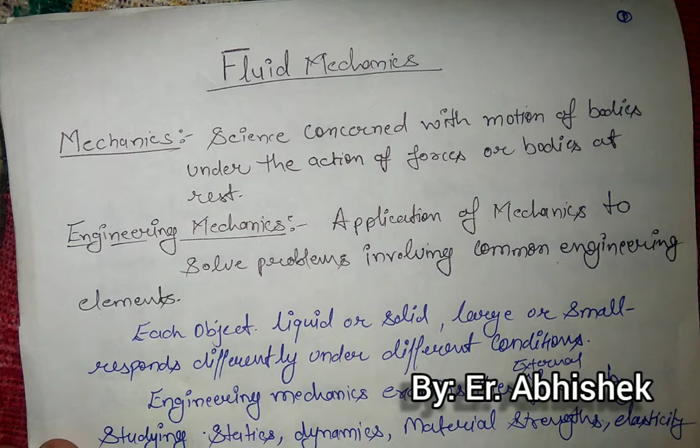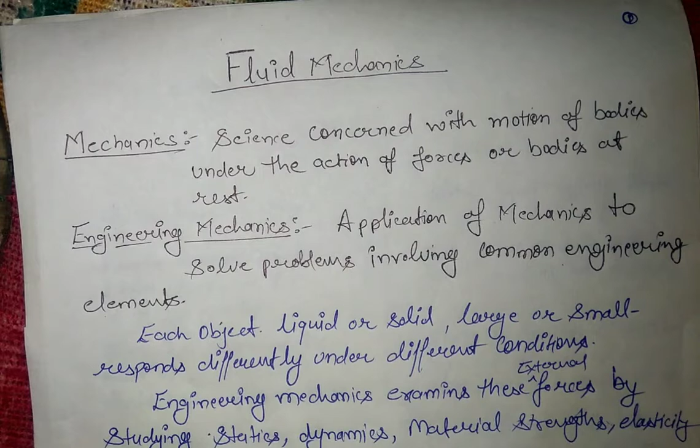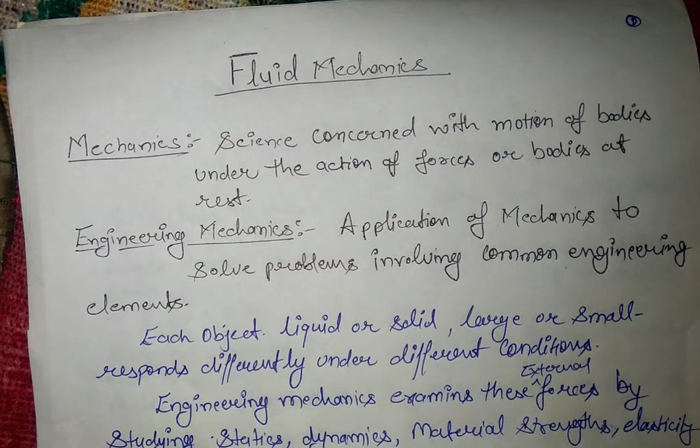So today I am going to start with the lecture on fluid mechanics. This is one of the important subjects in civil engineering or mechanical engineering. I will take into consideration all the important aspects of fluid mechanics as per civil engineering point of view.

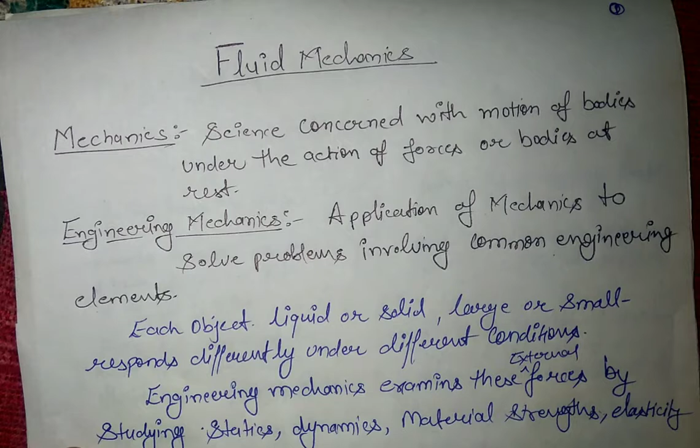Before moving into the details of the subject, let us take an introductory session on fluid mechanics. I'll give you a brief detail about the subject first, then we'll move into the core part of the subject. So before starting fluid mechanics, let us discuss briefly about mechanics first.

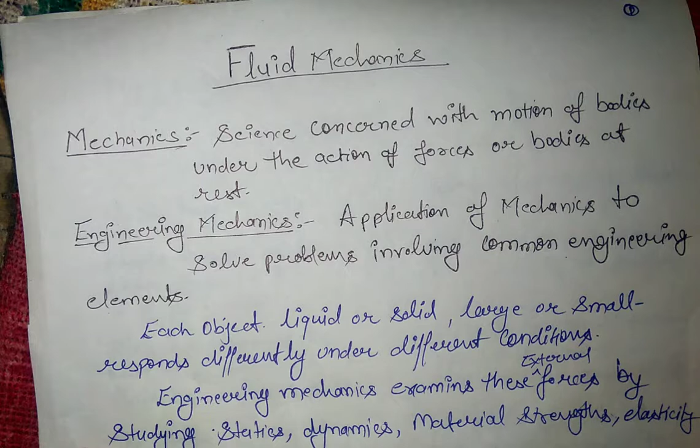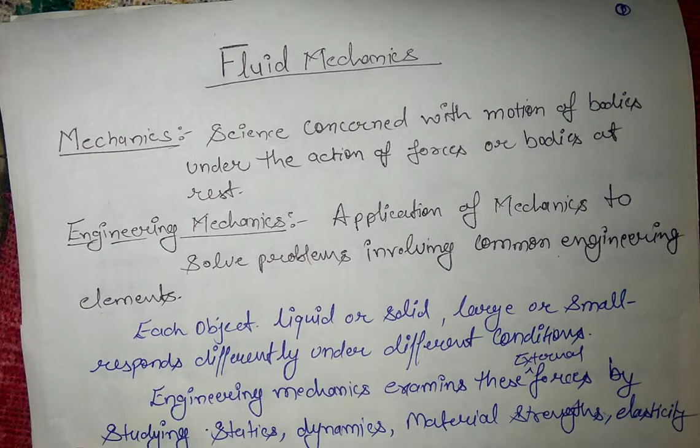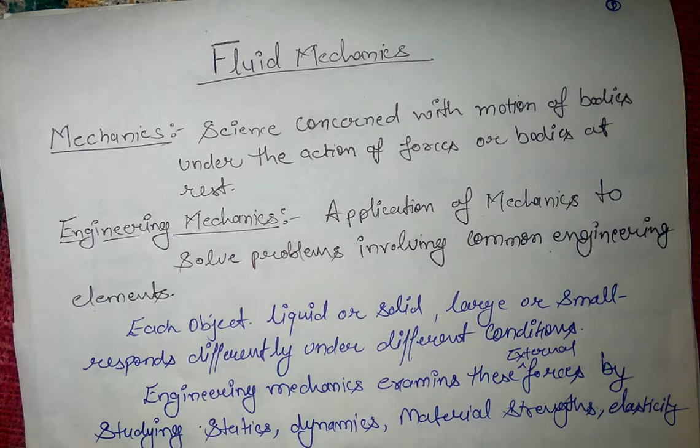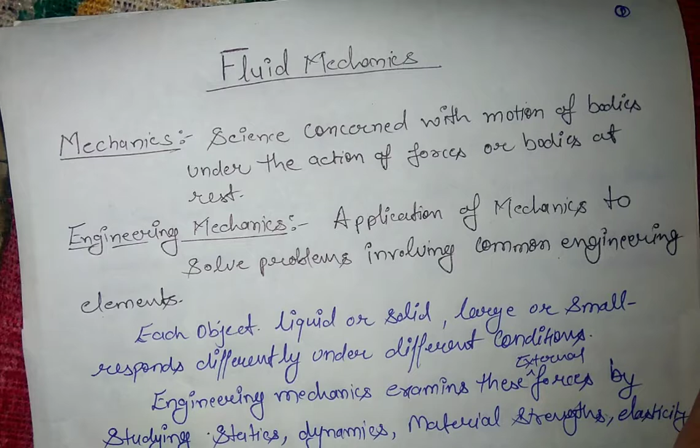You know that there are many physical laws that govern life on this earth, for example, gravitation. All these types of phenomena that occur directly depend upon the forces and impact of forces. So what is mechanics? Mechanics is the science concerned with the motion of bodies under the action of forces, or bodies at rest. In brief, mechanics deals with the forces and their impact on the body.

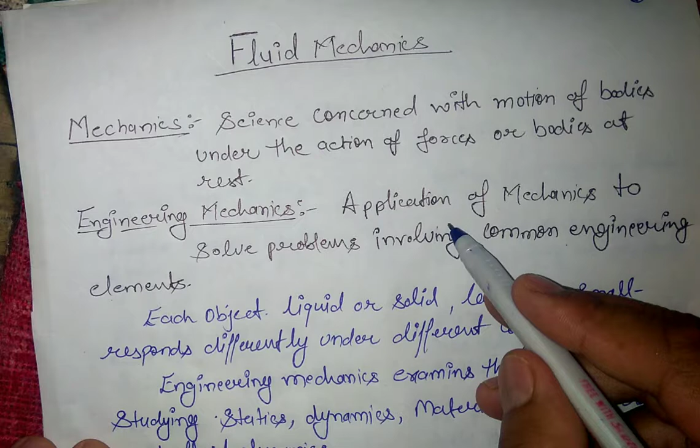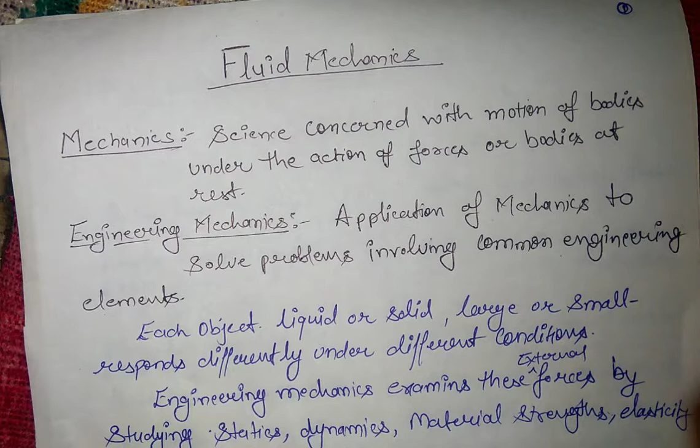Now what is engineering mechanics? Engineering mechanics is the application of mechanics to solve problems involving common engineering elements, like fluid mechanics, like solid mechanics. We are applying mechanics to engineering problems so that we can get solutions for the problems. That is termed as engineering mechanics.

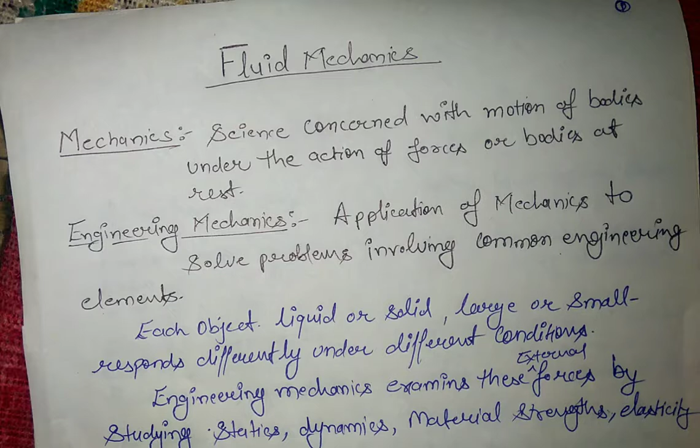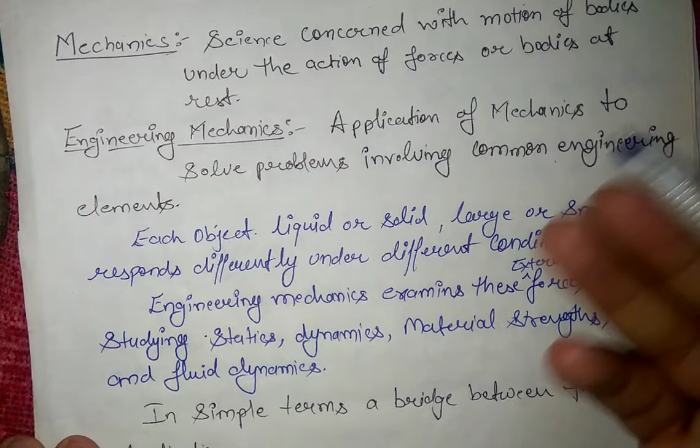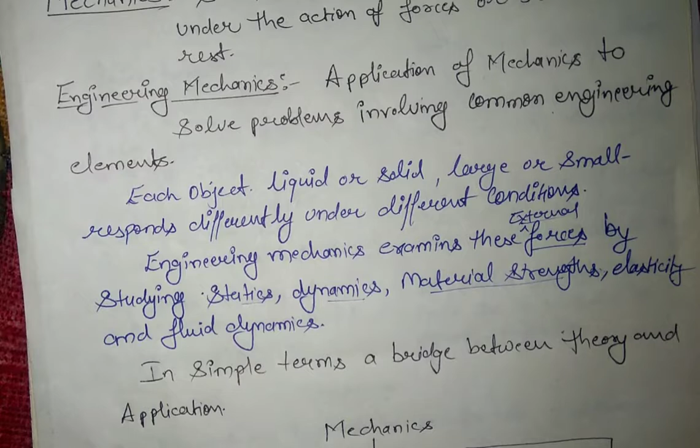Each object, like solids or liquids, large or small, responds differently under different conditions. Engineering mechanics examines these external forces by studying statics, dynamics, material strength, elasticity, and fluid dynamics. In simple terms, it is a bridge between theory and application. I hope you have got a clear idea about mechanics: it is about the involvement of forces on any object.

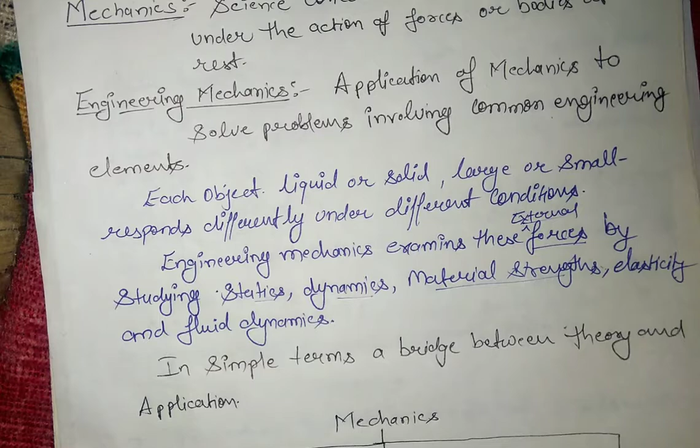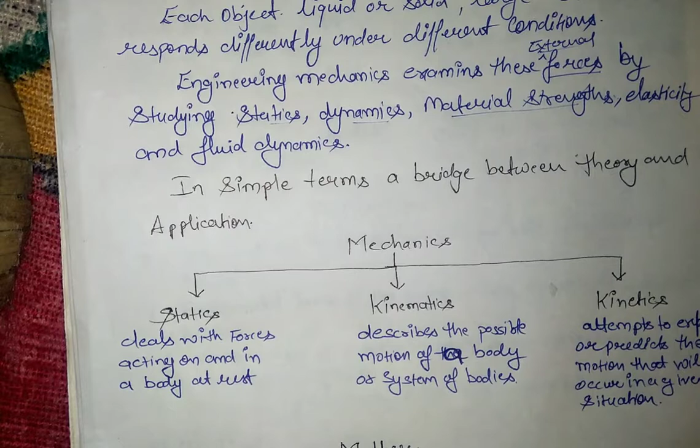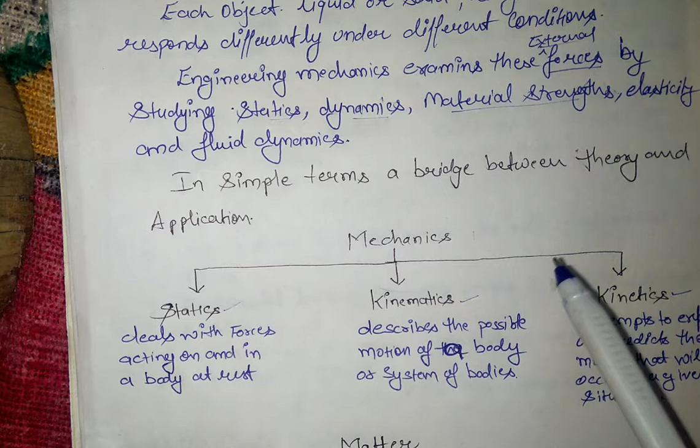Let us take into account the different branches that we study under mechanics. There are three branches: first is statics, second is kinematics, and third is kinetics. This is very important in physics. In physics, mechanics is a separate branch which we divide into three categories: statics, kinematics, and kinetics.

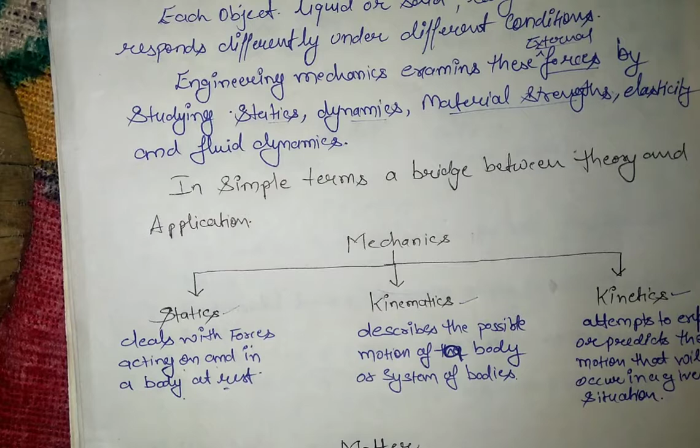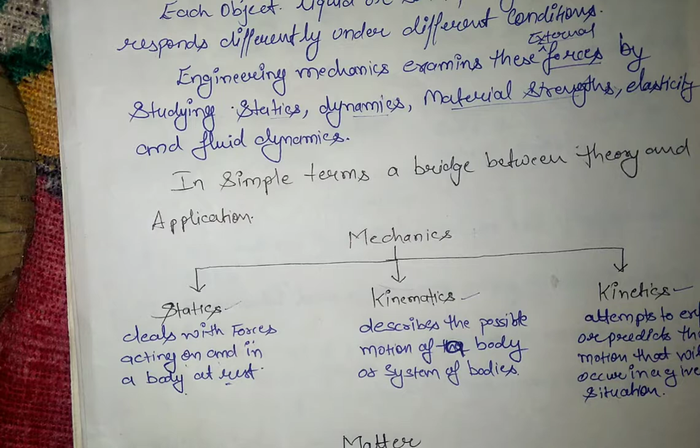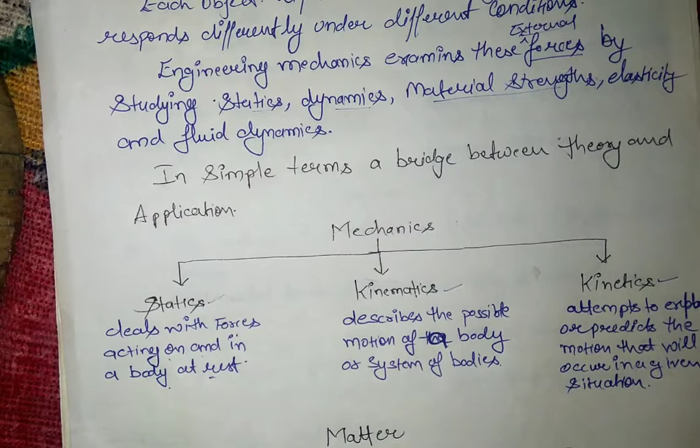So what is statics? Statics deals with the forces acting on and in a body at rest, anything that we study at the position of rest. Now what is kinematics? Kinematics describes the possible motion of a body or a system of bodies; when we talk about motion, that is kinematics. And what is kinetics? Kinetics is an attempt to explain or predict the motion that will occur in a given situation. So these are the branches.

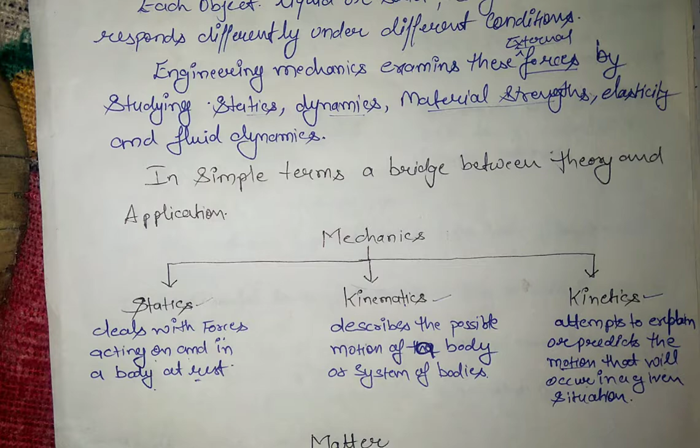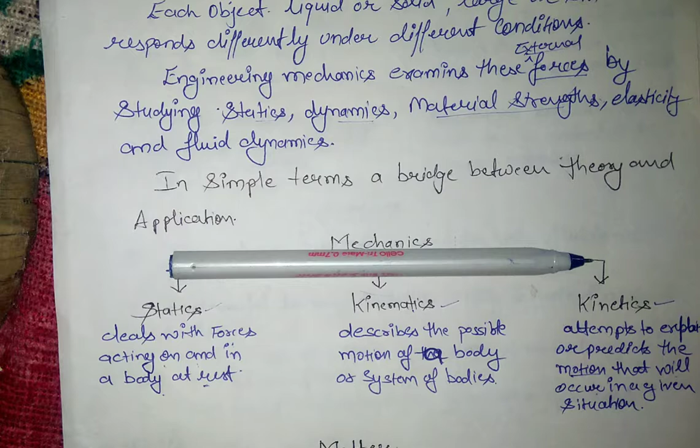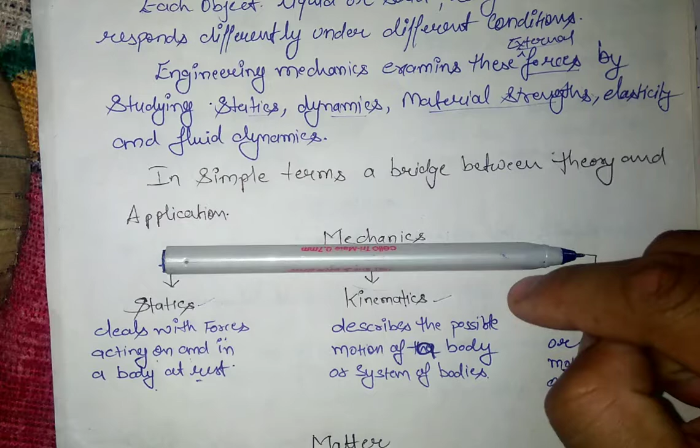Let's consider an example with this pen. Currently it is at rest. There might be several forces acting on this pen at this point of time. Whatever the impact of the forces on this pen at the position of rest, that we study under statics. When we apply some external force, the pen starts to move; that is under kinematics.

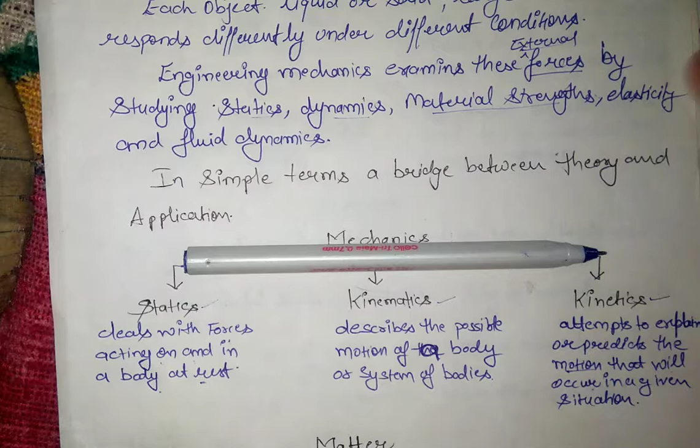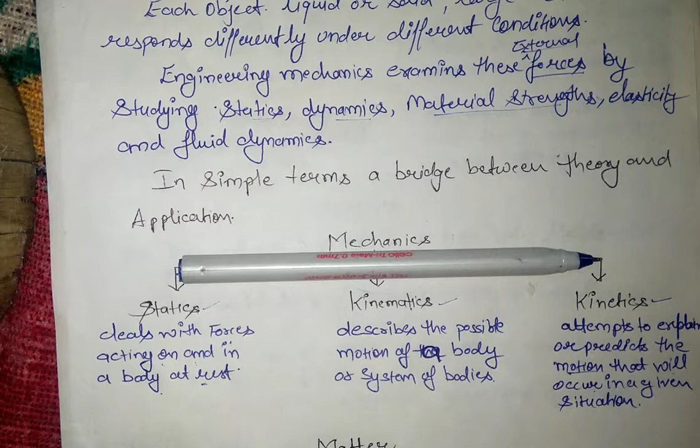And what is kinetics? Kinetics means when we try to predict the motion of this pen under a certain situation. Suppose the temperature and other things that influence the properties of this pen are fixed, and then we study the motion of this pen.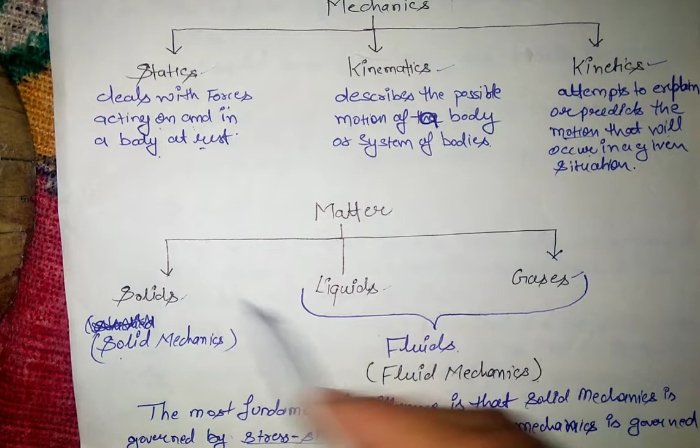Now let us take into account that there are three types of matter: solids, liquids, and gases. For solids, we study the impact of forces on solids, and that we study under solid mechanics.

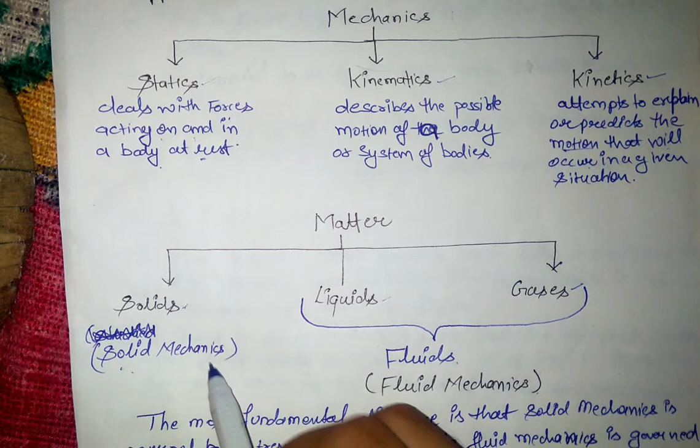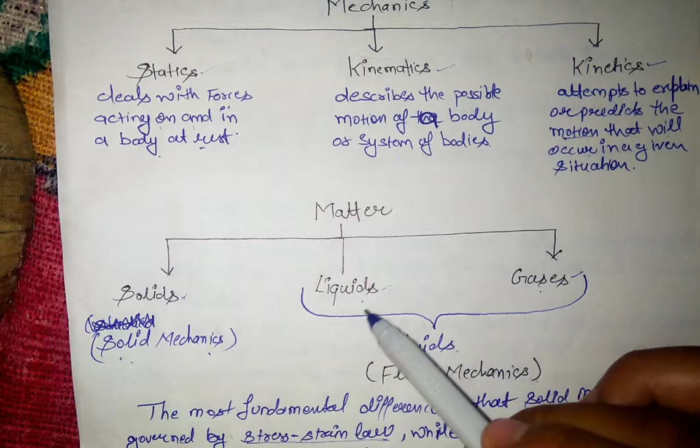Liquids and gases are termed as fluids. When we study the impact of forces on liquids and gases, we study it under a different branch that is called fluid mechanics. So these are termed as fluids.

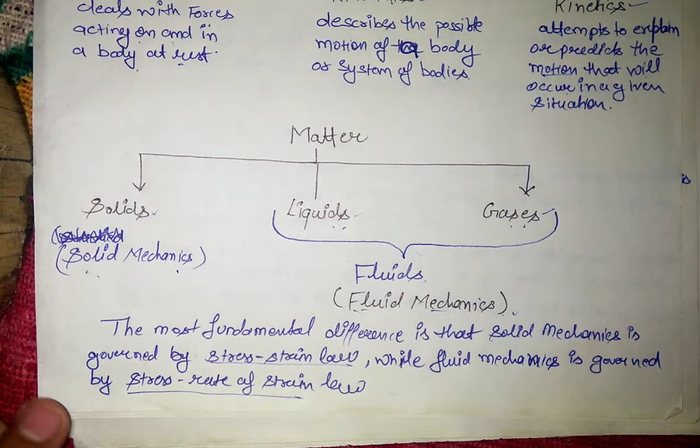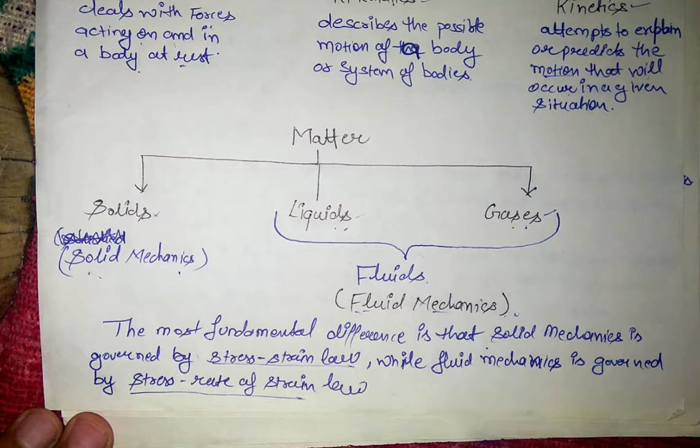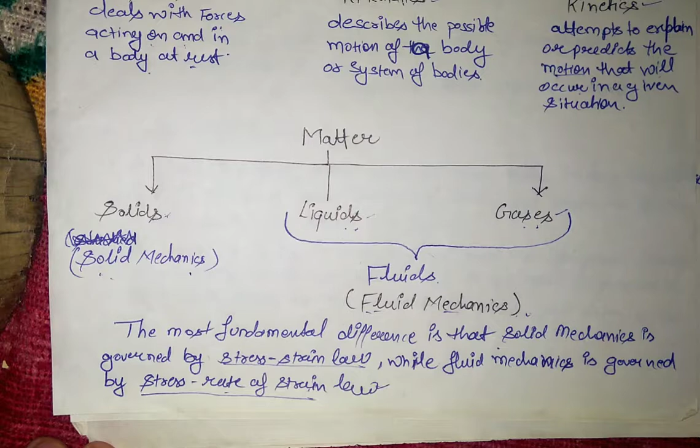So what is the basic fundamental difference from an engineering perspective? The most fundamental difference is that solid mechanics is governed by the stress-strain law, that is Hooke's law, while fluid mechanics is governed by the stress and rate of strain law. This is the basic difference. We'll study this in detail in a further lecture.

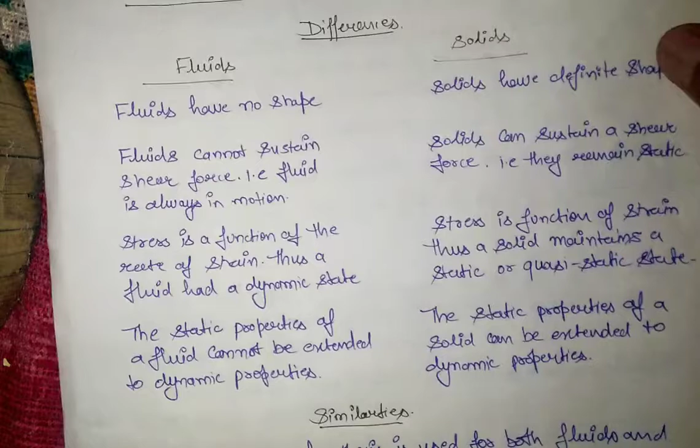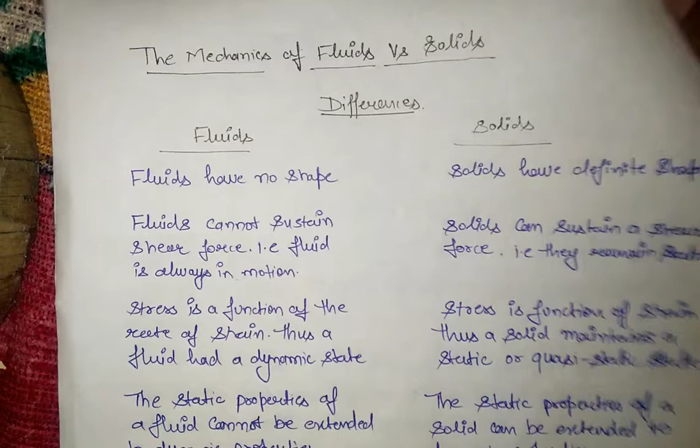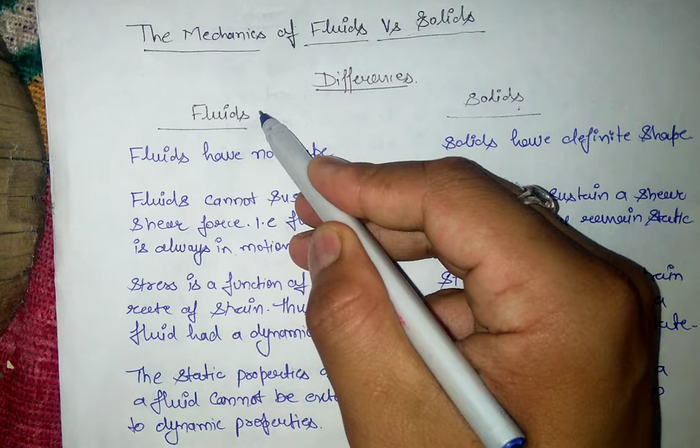Now let us consider the differences and similarities between the mechanics of fluids and solids. Here you can see fluids and solids. In fluids, for example, we take water and air. First, fluids have no shape, while solids have a definite shape. This is the first difference.

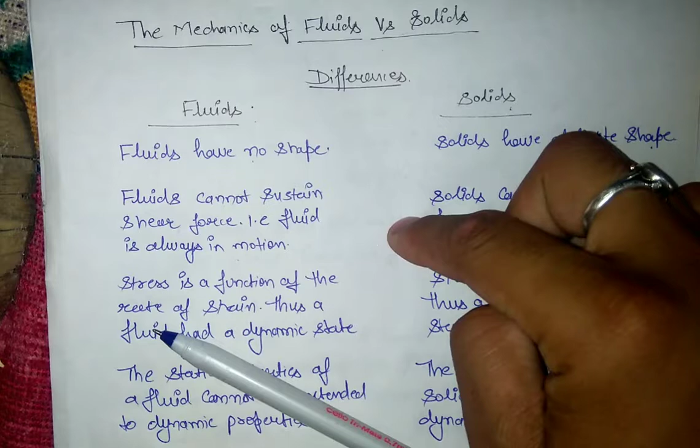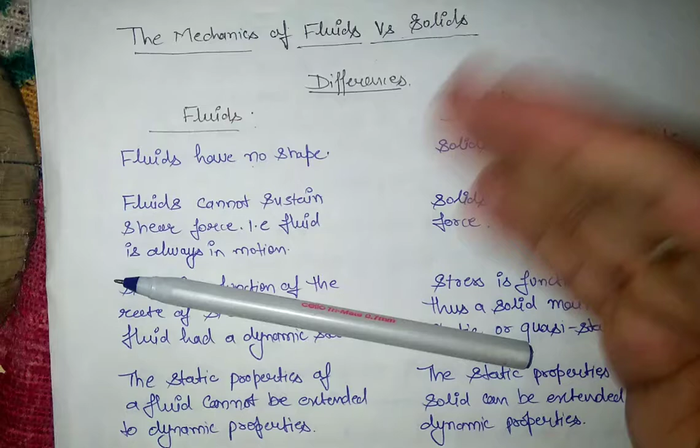The second one is that fluids cannot sustain shear force, so the fluid is always in motion. If I put this pen on this table and spread water on this table, what will happen? The solid can sustain a shear force, but the fluid cannot sustain shear force; it starts to flow whenever I spill the water on the table.

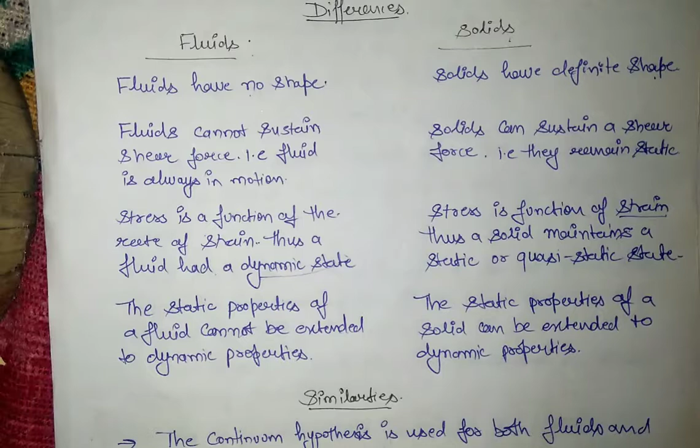The next difference is that stress is a function of rate of strain, thus fluid has a dynamic state. In fluids, stress is directly related to strain rate, while in solids, stress is a function of strain, not rate of strain. Rate of strain means it is continuously deforming, whereas solids do not continuously deform.

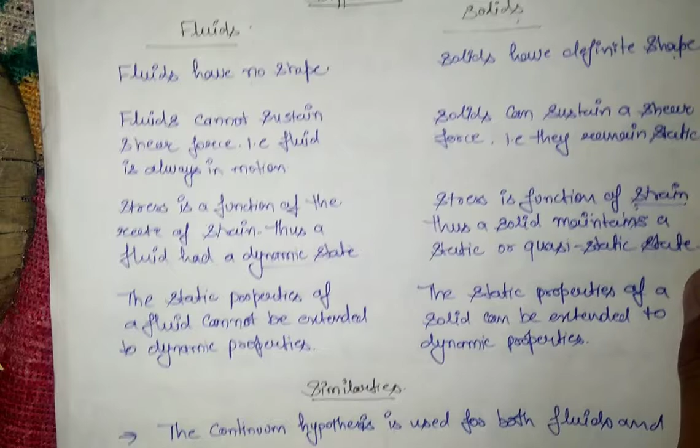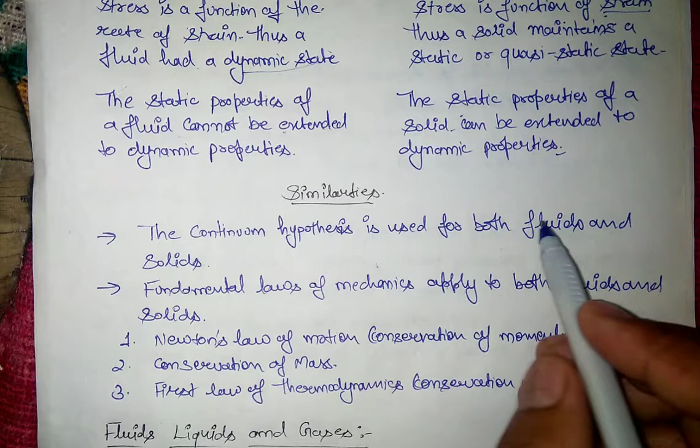The static properties of fluids cannot be extended to dynamic properties, while the static properties of solids can be extended to dynamic properties. These are some differences, but there are some similarities also. The continuum hypothesis is used for both fluids and solids: we consider particles continuously distributed, with no space considerations. So in both cases, fluids and solids, we take a continuum hypothesis.

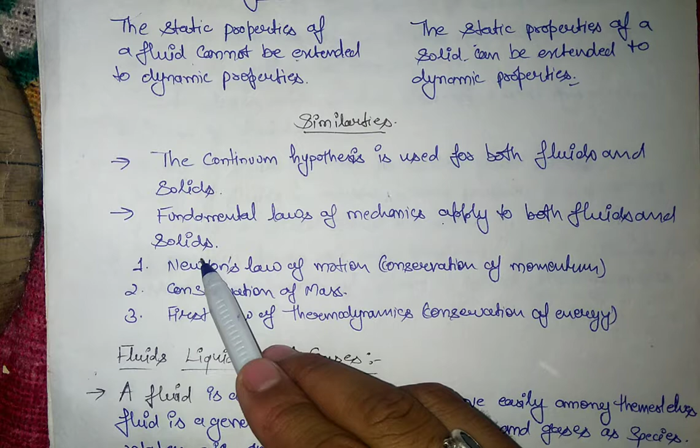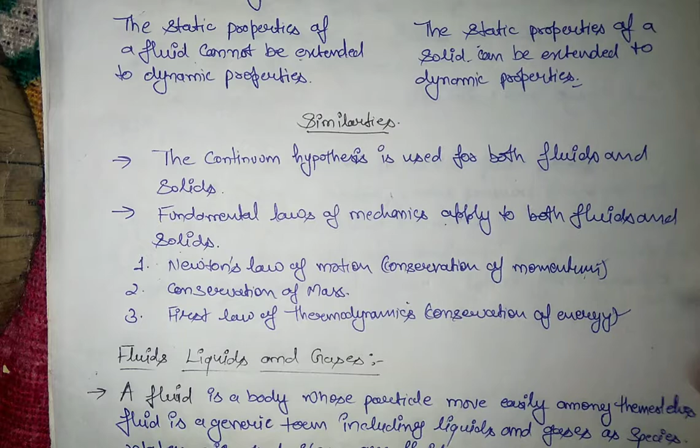Next, the fundamental laws of mechanics apply to both fluids and solids. What are the fundamental laws of mechanics? Newton's law of motion, that is conservation of momentum, conservation of mass, and the first law of thermodynamics, that is conservation of energy. All these laws are applicable to both solids and fluids.

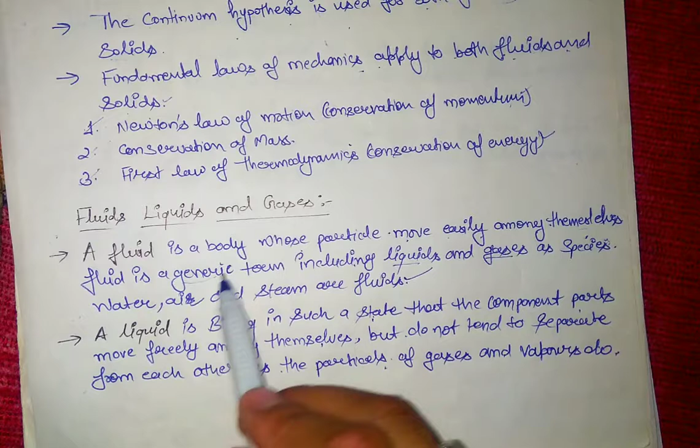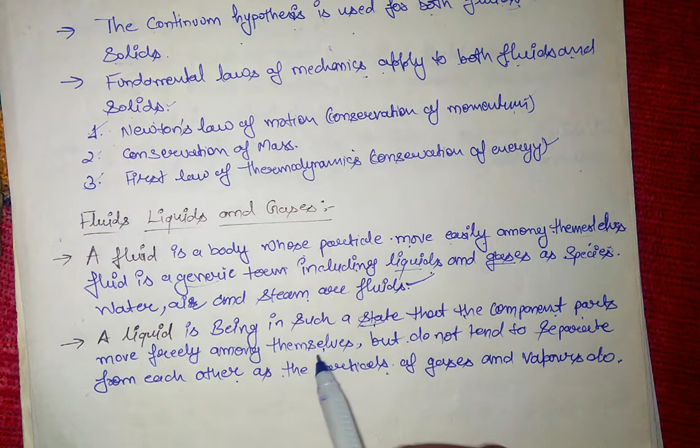A fluid is a body whose particles move easily among themselves. That's why fluid is a generic term, and it includes liquids and gases as species. Water, air and steam are fluids. A liquid is a state in which the component parts, the molecules, move freely among themselves but do not tend to separate from each other as the particles of gases and vapors do.

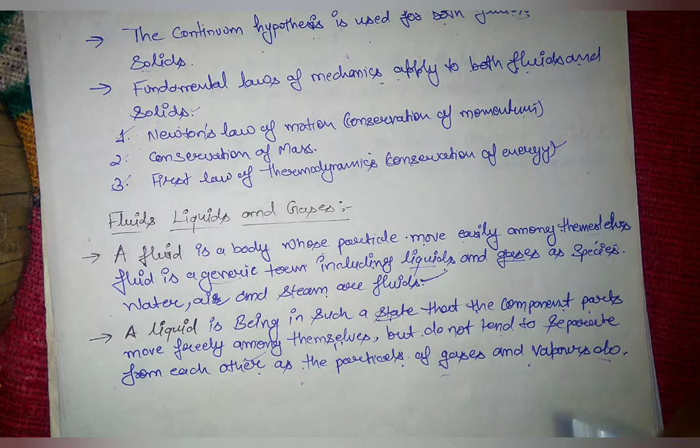The molecular distribution in gases and liquids is different. In gases, the molecules are very far apart, and in liquids the molecules are very close to each other. This is the difference between gases and liquids, whereas gases and liquids both come under the category of fluids. So this is all about this video.